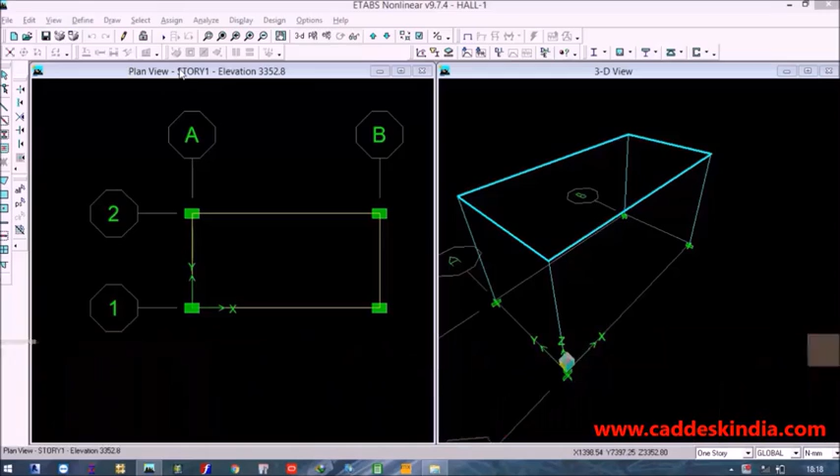Hello everyone. We have discussed how to create the geometry, supports, properties and load cases. Now in this session we will discuss the analysis and design part. So this is our project file of a banquet hall, and in this we have done all the input data.

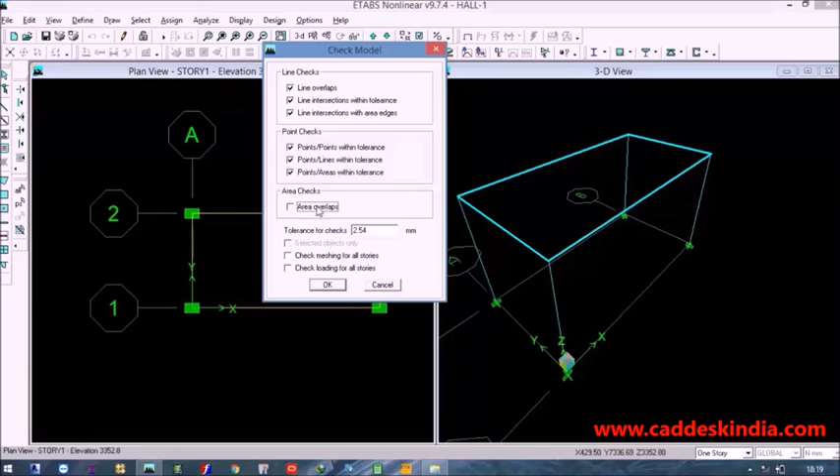After that, for analysis, just go to the Analysis option and first click on Check Model. When you click, a dialog box appears in front of us. Here you can check the different parameters, whether the geometry you have created is okay or not. So I just click on check all the options and click OK. Now the model has been checked, no warning message found. So it is okay for analysis purposes.

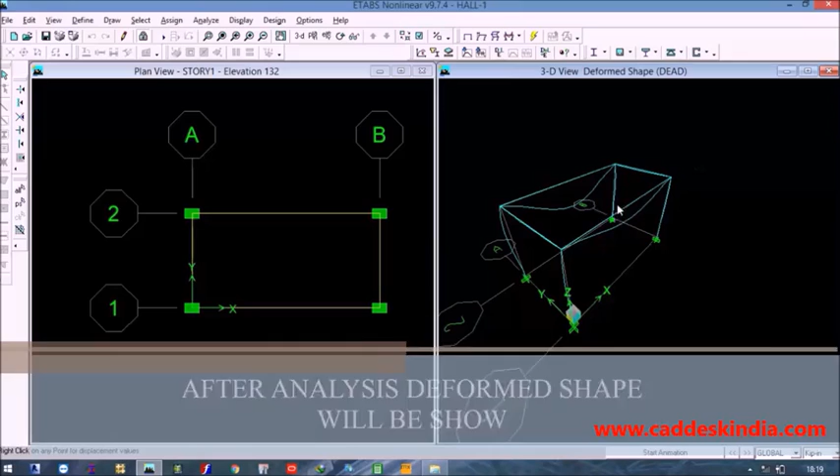So just click on Run Analysis, or press the F5 shortcut. When analysis is done, on the right-hand side you will see the deformed shape in the 3D view. First click on the undeformed shape if you want to check the analysis results. So our next step is verification of results, meaning whether the bending moment diagrams and shear force diagrams are okay or not.

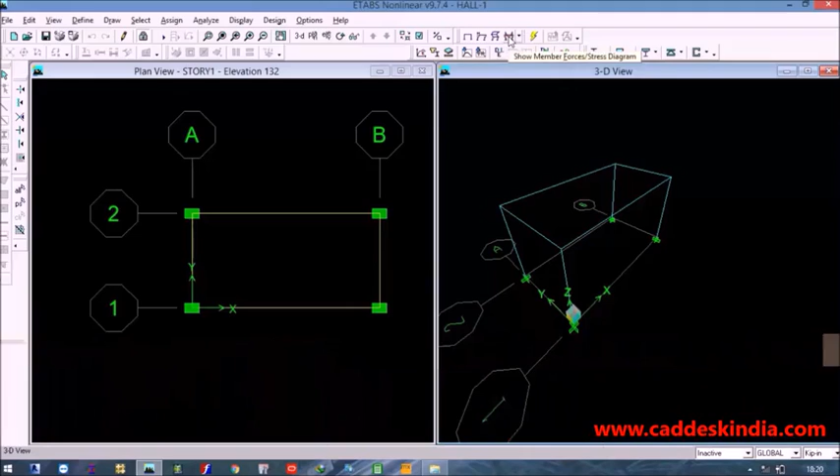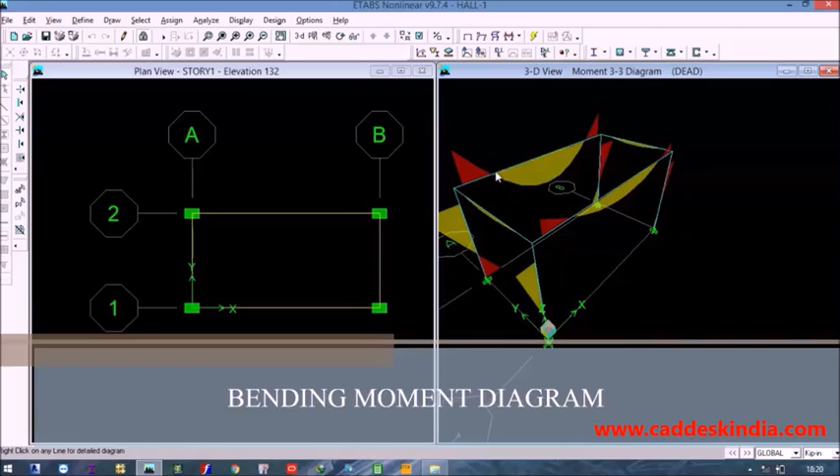So just click on Member Forces and click on the Frame Forces option. For checking the bending moment, select Moment 3-3 and click OK. Here you can see the different color codings. At the ends I have red color and at the center part I have yellow color. So it is showing where I have tension for these particular beams. At the ends I have tension and for the center part I have tension. Similarly in the columns.

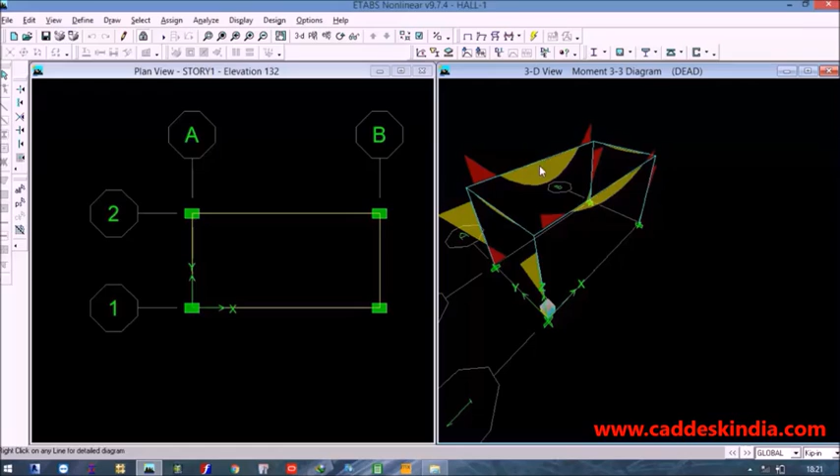Now after that, suppose this beam has major tension at the ends and center because I have applied a 12 kilonewton per meter UDL wall load for this beam, and this beam has no other wall loads. That's why it has more moment.

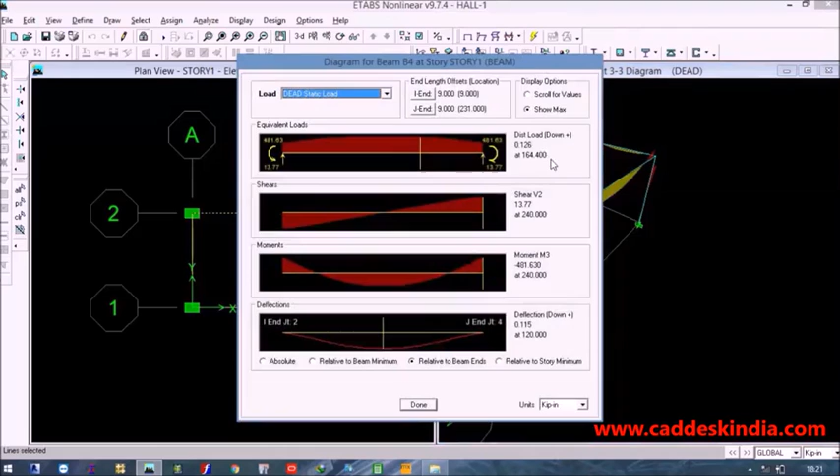If you want to check the result individually, just select the member and right-click your mouse. A dialog box shows the diagram for beam number B4 at story 1, and you can check the different results. These are your moments. If you want to check a particular distance, just move the scroll from start to end and you can check the moment. Similarly, you can check the shear force values at particular ends and midpoints.

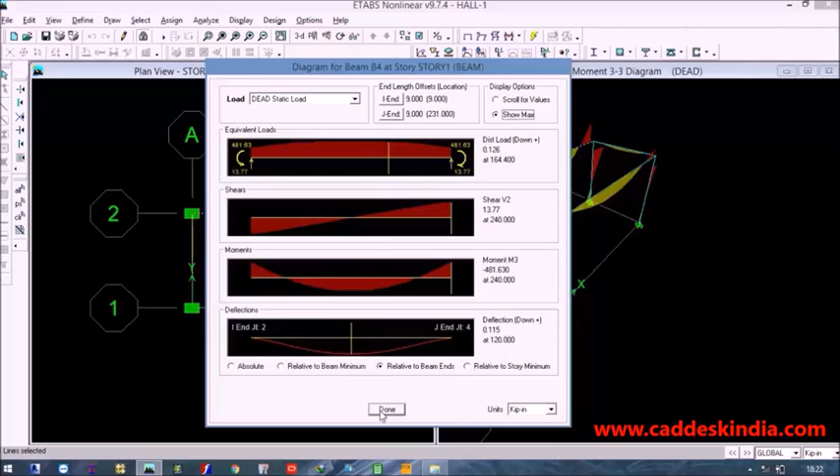If you want to check the maximum value, select the Show Maximum tab, and here you will see I have minus 481.6 kip-inch end moment, and shear 13.77 for this distance, and this is your deflection value, and this is of 120. Now these are the moments.

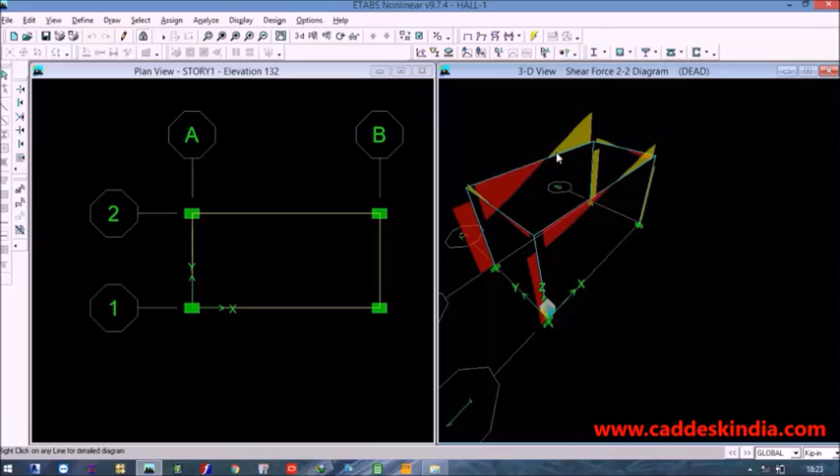Suppose I want to check the shear force, so again go to Frame Forces, select Shear 2-2 and click OK. You can check the shear result for this frame section, and here you can see this beam has more shear compared to this beam, because I have the wall load for this beam. After that, you can check the torsions and the axial forces.

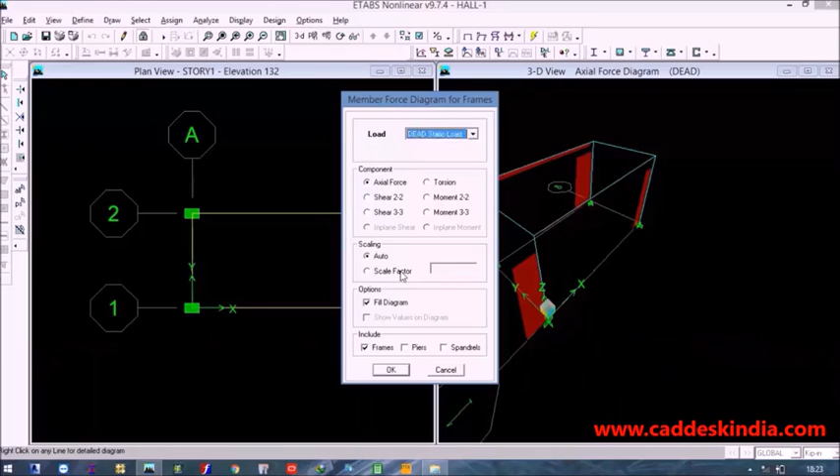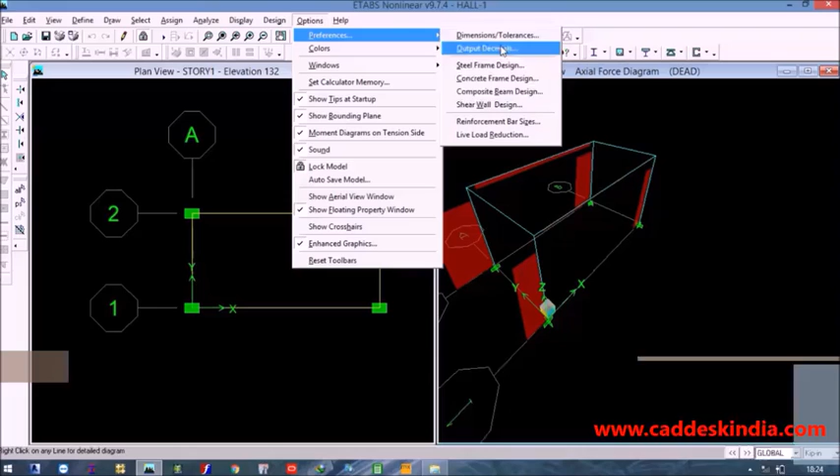Now this is your analysis part. After that, we check the design part. Before going to design, select Options, Preferences, Concrete Frame Design, and select the code. This is IS 456. Now go to Design, Concrete Frame Design, and click on Start Design/Check of Structure.

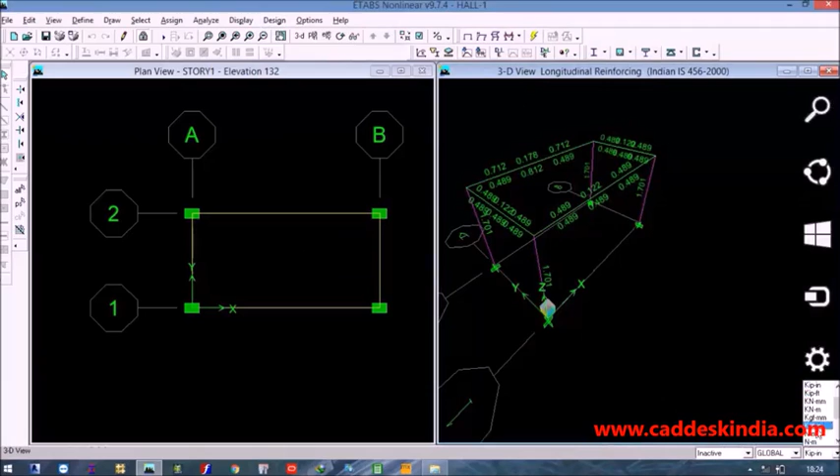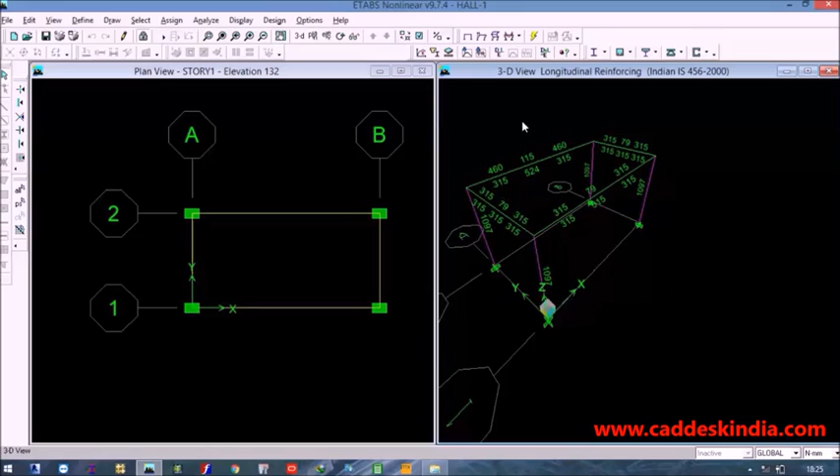Just changing the units. When the job is done, in this tab you will see the reinforcement area. Here I have more moments at the ends, and at the center of the bottom. So here you can see 460, 460 and 524 reinforcement, and where I have less moment, less reinforcement. At the top I have only 115 mm square, and at the bottom only 315 mm square steel.

If you want to check the percentage of steel, go to Design, Concrete Frame Design, click Display Design Info, select the Design Output tab, select Rebar Percentage and click OK. It will show the percentage of steel. We know the manual formula: Ast divided by cross-section area times 100 equals the percentage of steel. So this is showing the percentage of steel for this particular member.

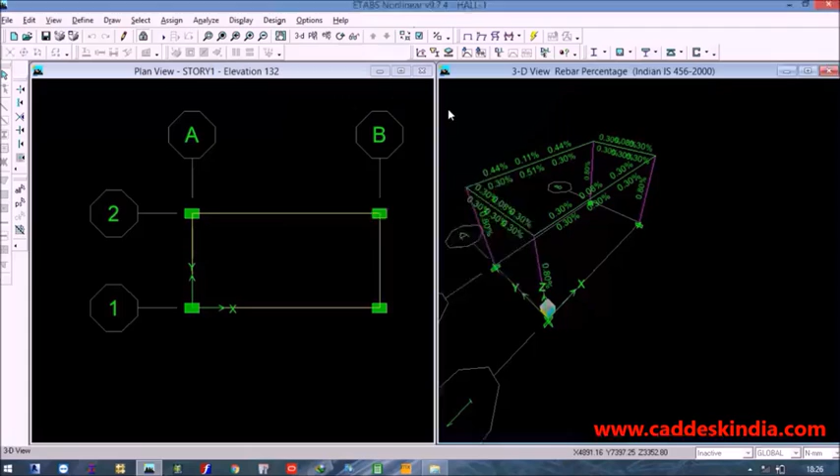Now if you want to check the column P-M-M interaction ratios, I have different color codings, this is green and this is pink. Here I have a range of color codings. If I have a red value, the column or beam is unsafe, and if the value is less than 1, my column and beam are safe.